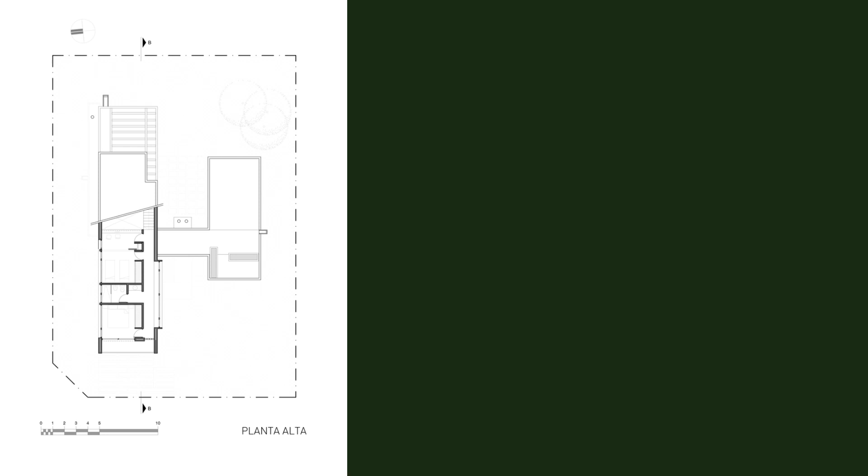House 3 by Estudio Galera in Ostende, Argentina. House 3 is part of a larger complex that has gradually been built for the same family over time. It is the third of a total of 6 residences planned in 2016 through a master plan that encompasses not only housing, but also amenities and green spaces at the center of the complex.

Set in a block near the sea, the dwelling rests on the blurred boundary between Ostende, the most densely populated area of the city and mostly occupied by the working class, and Mar de Ostende, a tourist area that acts as a bellows between the sea and the city itself.

A border or edge condition among these two areas is generated not only in terms of the perception of security and privacy, but also in the clash between the rushed life of workers and the slow world of those who are on vacation.

From a topographic perspective, the lot features a slope of 3.00 meters from the street at the front and the rear section of the lot, a conditioning factor that adds to the self-restriction of the master plan, where the center of the block is designated as an expansion space. Therefore, closing off to the streets and opening up to the green space entails closing the house to the north, which means losing sunlight inside the dwelling but recovering it in outdoor uses in a park that multiplies sixfold.

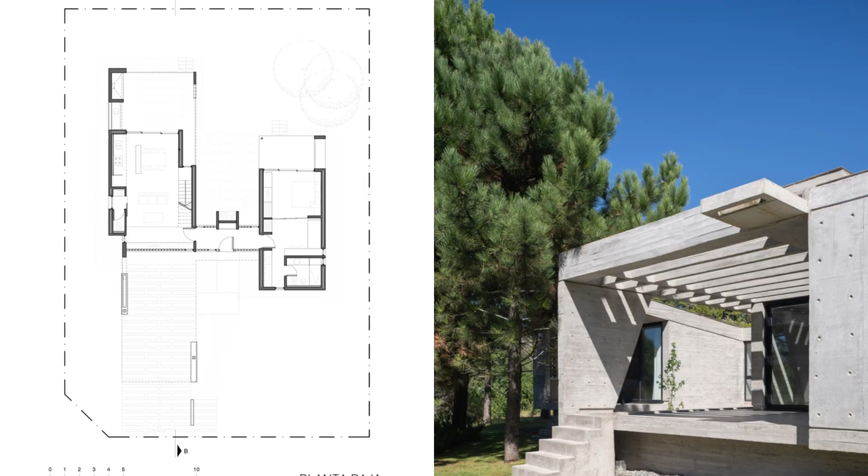Since this is a rental property, House 3 has to be versatile enough to host a different generic user every week and designed in a way that can be segmented and divided into 2 to accommodate a family and a couple simultaneously. In this sense, ambiguity and flexibility are key.

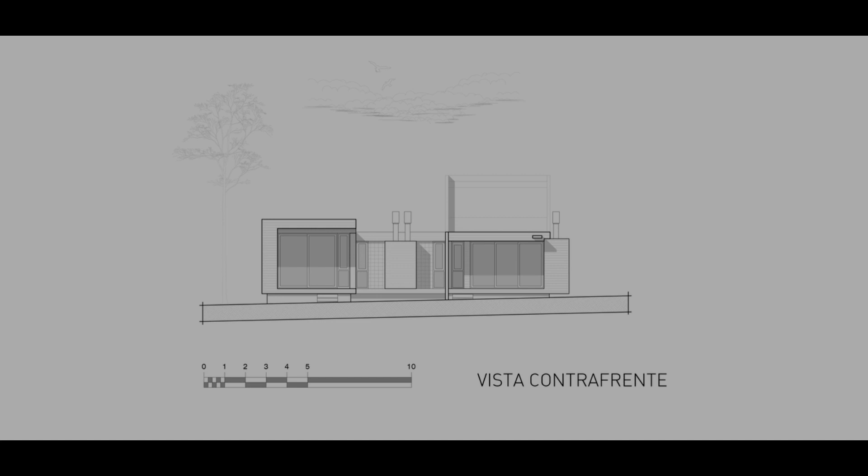This third house is projected as a succession of the previous ones, following the same construction logic such as the use of noble materials and replacing the common brick used in the first 2 units with exposed concrete. This third version of the extended program is consistent with the conceptual lines that originated the ensemble: simple execution with local labor and minimal maintenance.

By sharing spatial explorations and dimensional relationships with the pre-existing houses, a dialectic connection is established, in which they are all assimilated in formal terms but contrasted in their materiality. House 3, like the previous ones, is designed using a scarce catalog of materials: reinforced concrete, glass bricks, aluminum, glass, and cement blocks stacked horizontally to serve as visual filters rather than load-bearing elements.

The floor plan is divided into 2 inhabitable units that can function either as a single dwelling or be divided into 2 according to demand. This binuclear floor allows for the separation of the master bedroom on the ground floor to create an independent single-room unit, or be part of the rest of the house alongside the main volume, which nests the public uses on the ground floor and 2 bedrooms and a studio that overlooks the living room on the upper floor. This generates unique spatial relationships not present in the other houses of the complex.